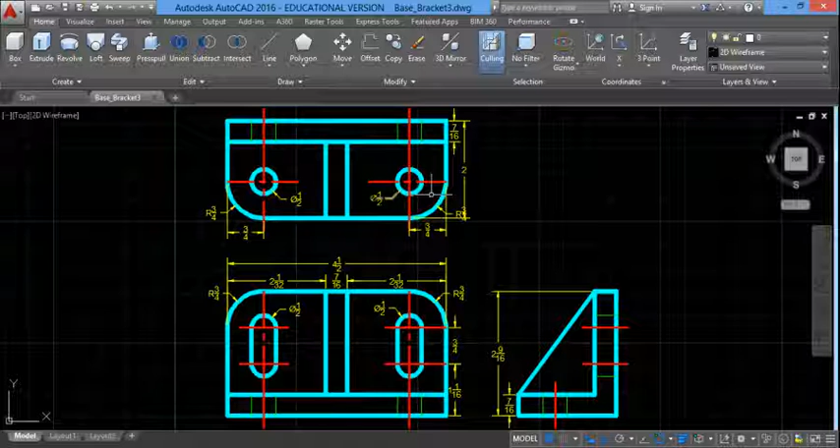In order to protect the original drawing you have made, make a copy of everything so you can work off to the side.

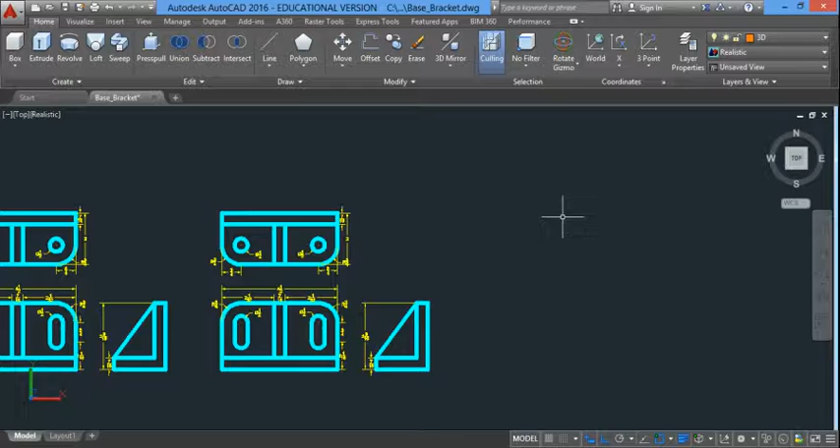Let's temporarily take off our dimensions, our center lines, and our hidden lines. If you haven't made a layer already for 3D, go ahead and do so. I made one and made it the color orange, which is the color 30. Let's take off our dimensions.

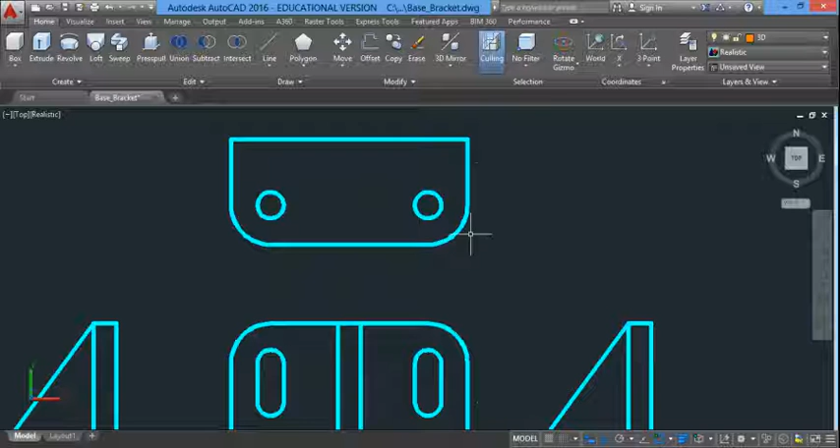I don't need these parts of this upper object. And then for the bottom, I don't need the bottom half of this. I'll need to trim that.

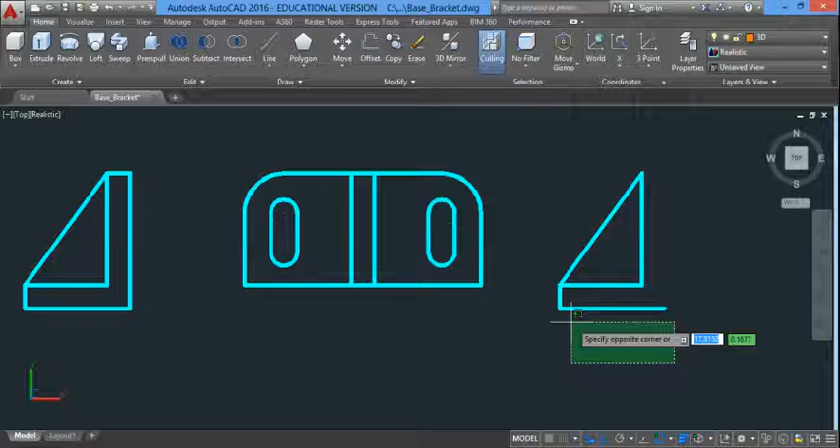Some of our commands for editing may or may not be up here, but to find them, you might have to use the down arrow here to find trim, for example. Trim off the part, or remove the parts we don't need for all these different features. Okay, so now, oh, I don't need this either.

So let's begin. We're going to switch to a southwest isometric so we can see what we're doing. The first command we need is called region, R-E-G-I-O-N. Select all these objects to turn them into solid shapes.

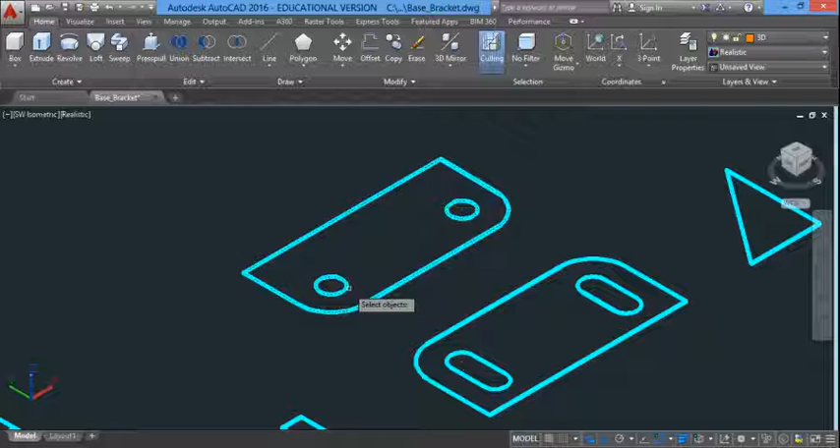I apologize, realistic was on. Let me go back to 2D wireframe. The regions will change to the layer which was current.

Let's type in region again. Do these here. Enter. Let's type in region again. Enter. What region does is it makes closed, continuous shapes.

We're about to use the extrude command to extrude these objects. Let me show you what extrude does to objects that are not closed. Let's say we wanted to extrude this, but we didn't region it.

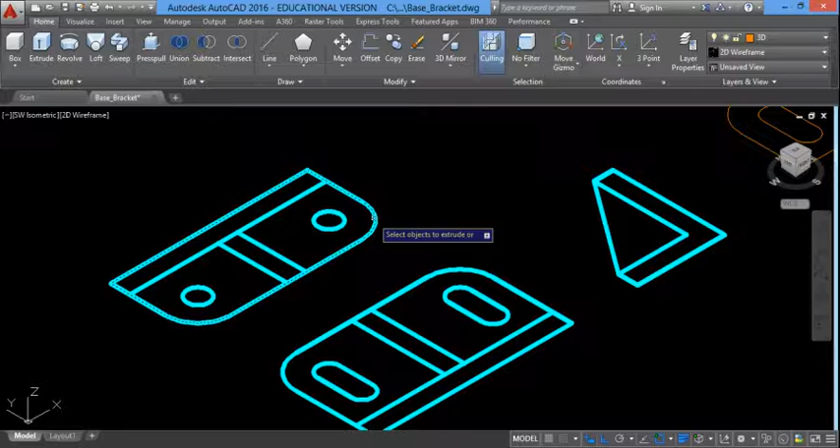It makes what's called a wireframe. That's not a solid object. So that also happens if there's a break in the object but you don't notice it, and you try to extrude, you'll also have this wireframe effect, which is incorrect. Make sure your objects are completely closed, which is why we use the region command.

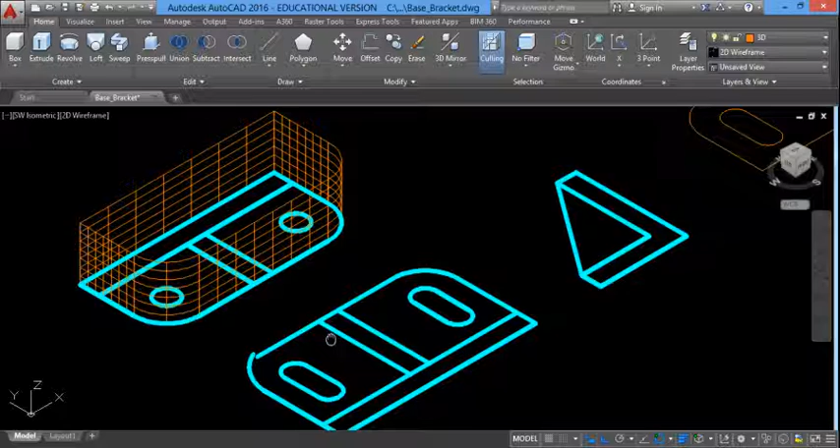Let me undo this so that I can keep its integrity when we finish the drawing. Alright, so the thickness is 7/16, so I'll type in extrude, or I pick this object right here.

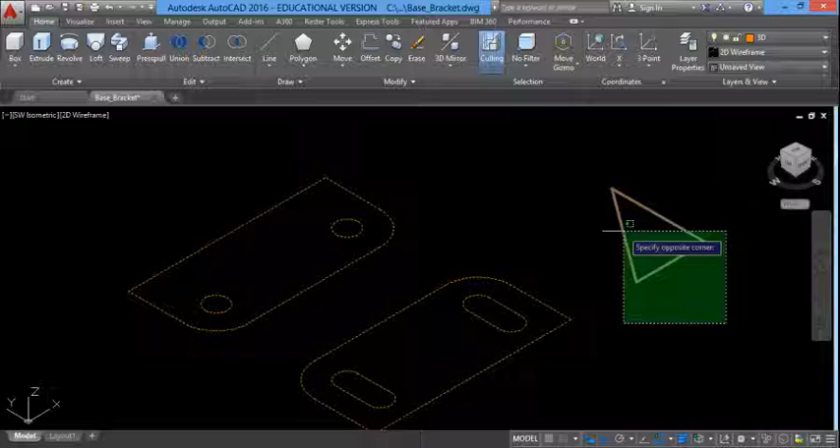I'll select this object. I'll also pick the holes. I'm extruding all three items separately. I could do them all at the same time actually. Let's just go ahead and do that, since they all happen to be the same thickness.

Type in 7/16, and there's all of our objects. However, they're not complete. We do need to subtract out the holes and slots. If I turn on the color, you'll see that all features are within each other.

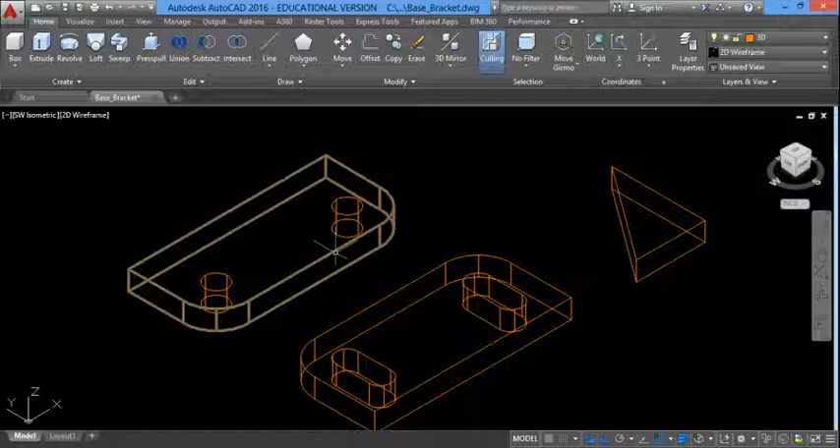So let's go back to 2D wireframe. The command we use to subtract is called subtract. We'll work with the base first. Subtract, select this object, hit enter, and then pick the small features, which are the holes, and hit enter. And let's see how we did.

There are the holes. Let's take off the realistic, go to 2D wireframe to subtract this feature. Whoops, I picked all three. Can't do that. Hit escape. Subtract, pick the large one, enter, and then the two slots, and then enter.

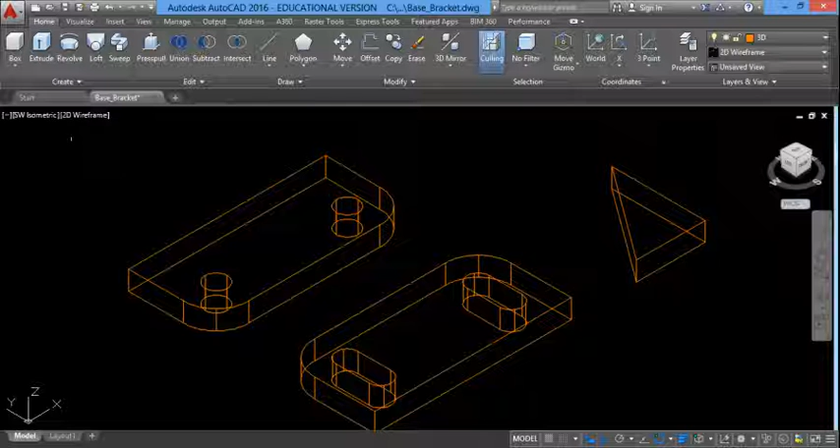Our subtractions are done, and we're going to use a command called align, A-L-I-G-N. I'll leave the color on for this purpose. To align, what we do is we move features from one to another.

The command is called align. To use align, we need to use 3 points along a nonlinear plane to move onto the surface. For example, the bottom of this will fit on the top of that. So I have some reference points I could use, the four corners, the midpoints of the object. Let me show you what align does if you just use one point.

I type in 'align', select the object, and hit enter. My mouse will say specify first source point. If I pick here and click where I want it to go, and hit enter a couple times, it'll move. That's all the align command does.

Let me undo that. If you don't see your messages on your mouse, make sure dynamic input is on. If it's not visible, click on this triple bar and turn on dynamic input.

Let's continue. If I align with just 2 points, it allows me to move and scale the object. I'm going to do this incorrectly to show you what I mean. I'll move this point to here, then put this point here and snap to the midpoint of the part. The mouse will ask, after I hit enter, do I want to scale the objects? If I say yes, it not only moves it but also scales it down to the distance in which I place that object. Useful for some things, but not for this drawing.

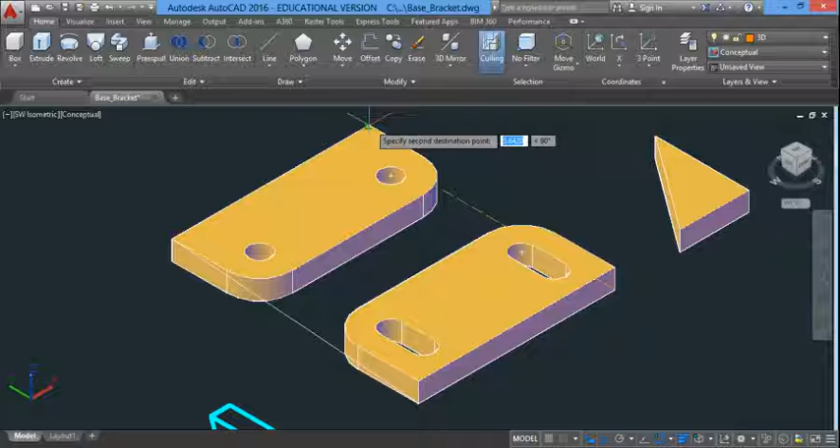So let's undo that. The other align command I want you to use is a 3-point alignment. Type in 'align', select this object, and let's use 3 points. We'll use the first point to here, the second point to here, and the third point — I had to make sure it says endpoint — and the third point is not going to be here, otherwise it'll keep it flat. I need to force it to flip up.

In order to do that, I have 2 choices: I could put this corner along this edge, or this corner along this edge. You're probably thinking there's no line that's exactly 7/16 over here for me to place — that's okay, it doesn't matter, as long as it's aligned with this edge.

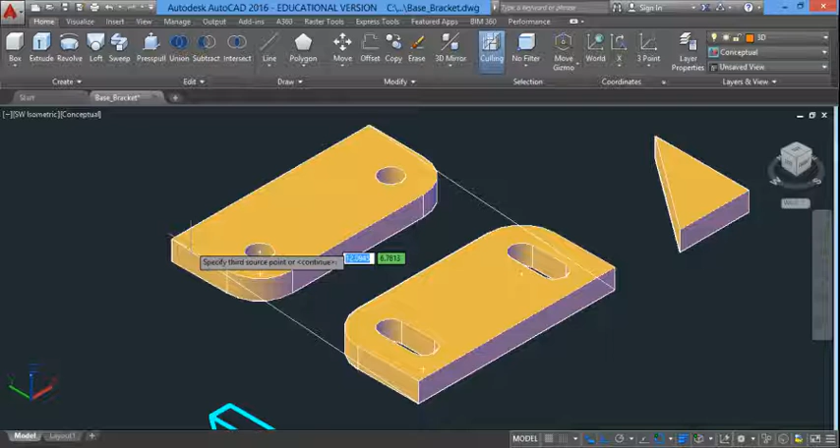So I'll pick this corner, which represents this line now, and be along this edge here. I could pick, for example, this midpoint. You'll see it move and rotate. Now, of course, we want to make sure that worked, so we have to do 2 things: take off the color, make sure the lines are directly on each other — and they are.

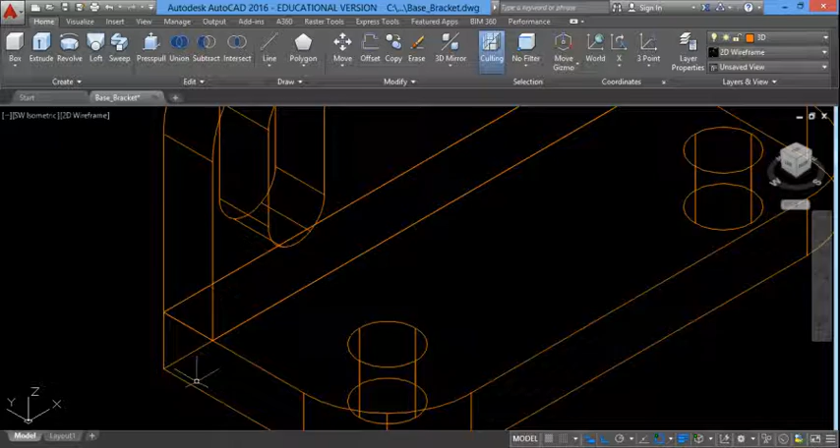Alright, to move this to here, we need to do the same thing, snapping points. However, at times we don't have features on here in which we could do that. We may — let's find out.

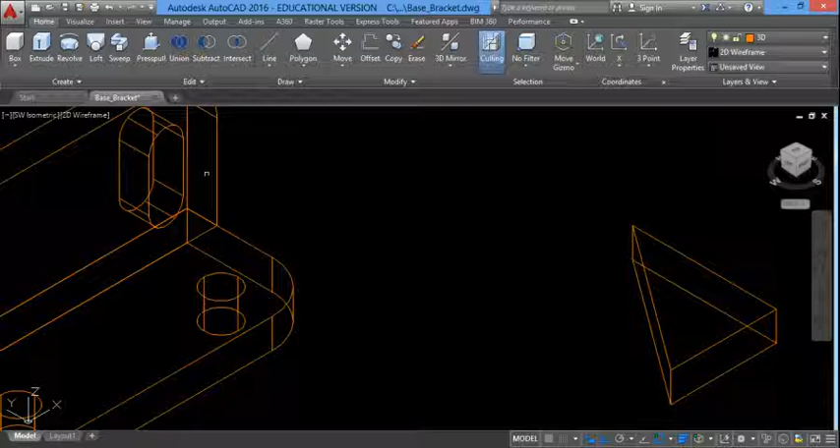For example, I know the top of this midpoint will snap to the midpoint of this feature. The midpoint of this will snap to the midpoint of this feature, and this would have to snap to the midpoint of this feature. However, it looks like there's some lines overlapping each other right here, so we might need to rotate this so we can see which lines we need to snap onto. You see that right there? That's important — if you pick the wrong snap points, your alignment may not work.

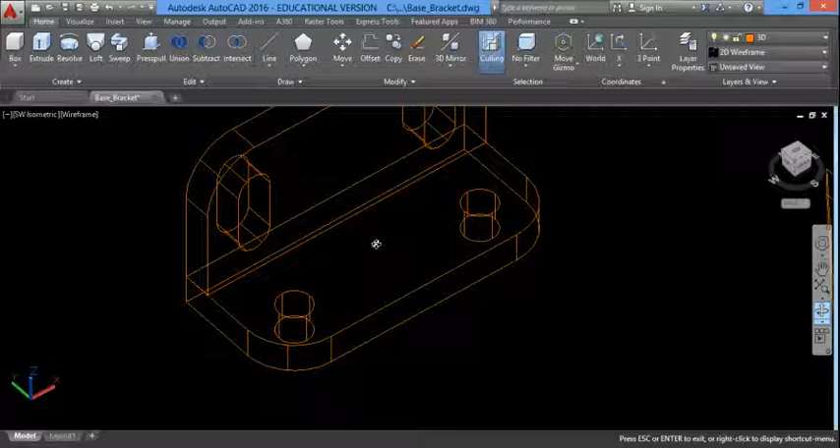So let's give it a shot. Let's move this closer so we can see it, and take off my ortho for a bit. Alright, let's try this — align. Select the object, hit enter. Find the midpoint of this to there. This belongs along the middle of this line. And the midpoint of this belongs to the middle of that line. Let's find out if it works.

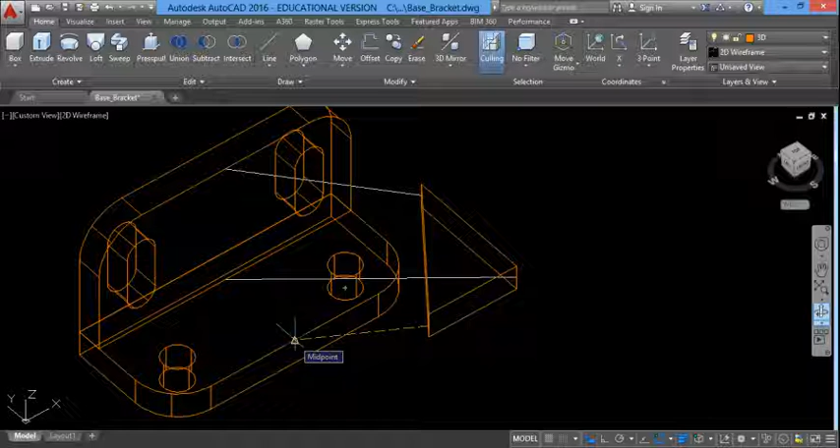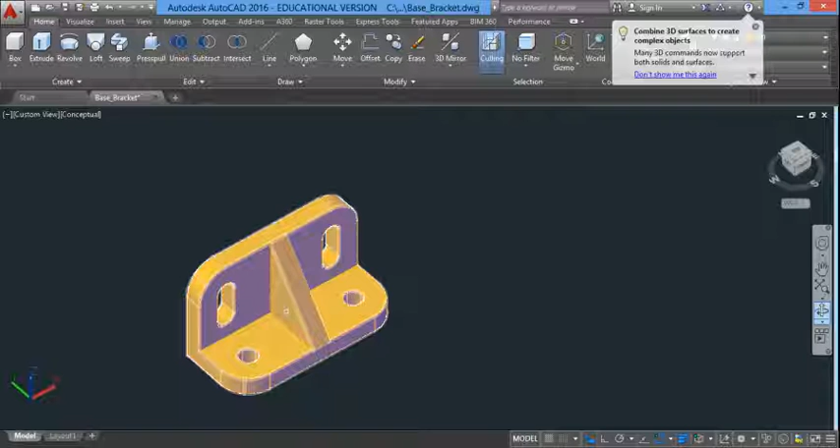And fortunately we did. Let's take a look at our object — looking good. Now we got to realize these are 3 separate parts. We need to union them together to turn it into one solid object. So pick union, select these 3 objects, and hit enter. And now we have our part. Pretty cool.

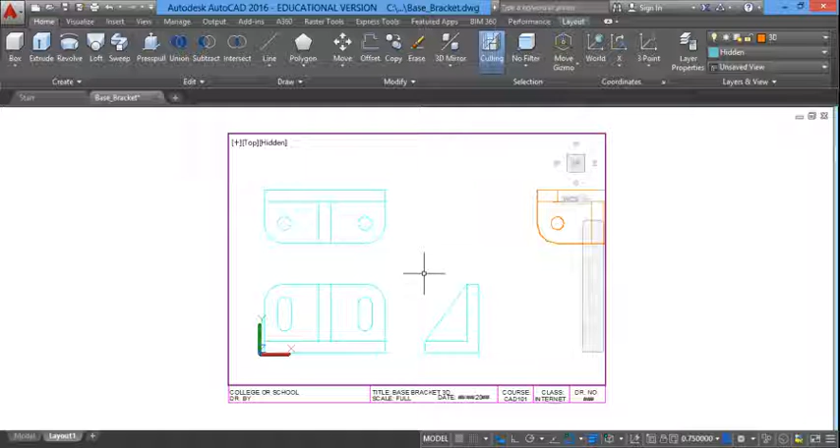Alright, let's go back to Southwest Isometric. So the object has to be displayed with our 2-dimensional drawing. If you go to your paper space, you'll see the view is actually looking from the top view. We need to get this orientation into an isometric view.

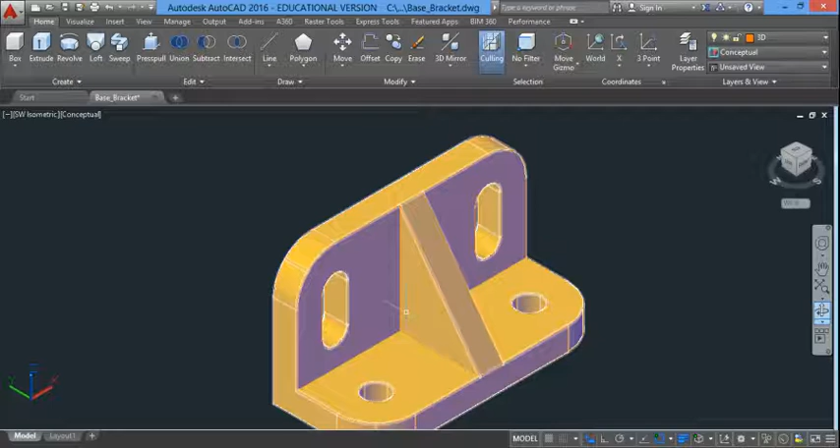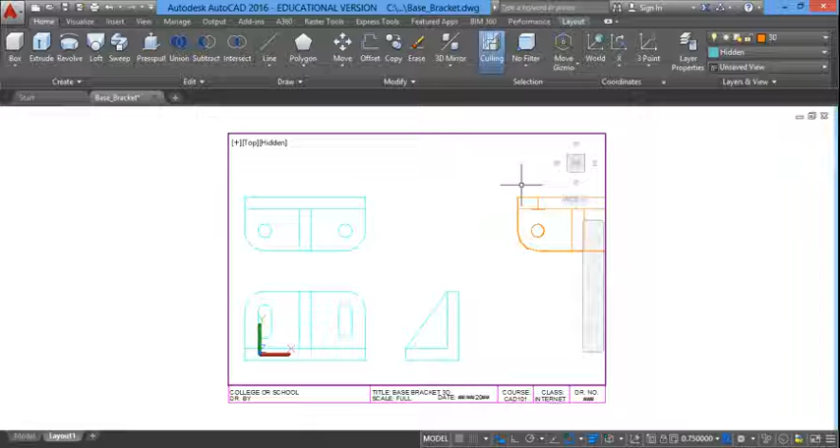There are 2 ways to approach that. I'm going to teach you a new one at this point. But before we discuss it, we need to decide which isometric view we want — the Southwest isometric, or not that one, Northwest, Northeast, Southeast isometric. Let's figure this out before we start. Our front view and our right side view are displayed here, which means the isometric of the 3D object needs to show the front and the right. That looks like the southeast isometric right here.

Alright, so here comes a new concept.

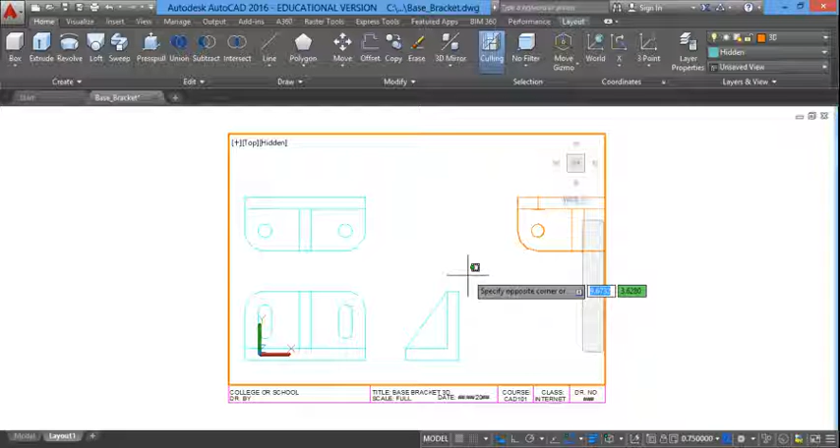I need to turn on the viewport layer, since we're going to be using that again. Here's the viewport for everything you see here. I'll click outside so I can grab my viewport and pull it down a little bit. I can still control my object when I click inside. However, I need to click outside and create a new viewport so I can display just this object by itself.

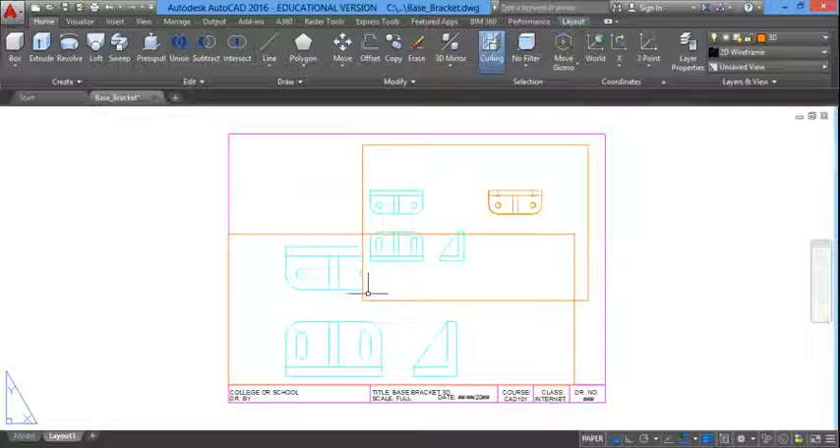So watch carefully. Type in mView on the viewport layer. I'm going to draw a rectangle using opposite corners with the mView command and make a second viewport. I'm doing this for a reason, and you'll see why now.

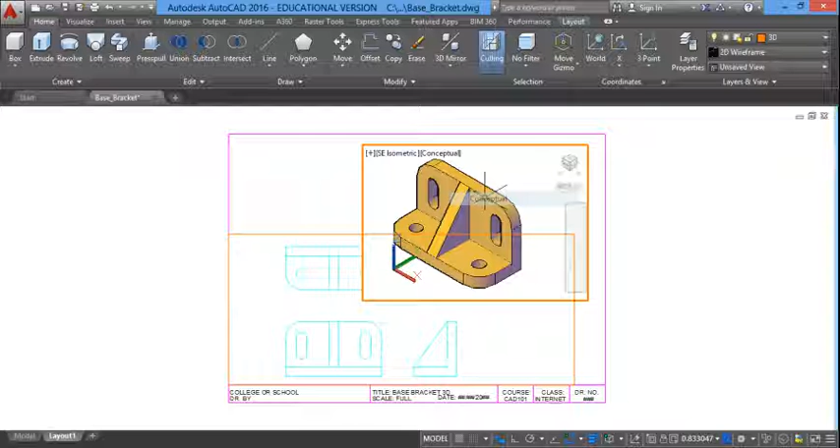I'm going to click on this corner once I get inside the viewport and change it to southeast isometric. I'll make sure hidden is on in this case. Let me show you what the other ones look like, but we're going to use no color, so hidden would be that feature.

Notice how in this viewport I can control the appearance of this, and in this viewport I can control the appearance of that. I can make this viewport a little bit larger. I should turn ortho back on to do this. I know there are some unusual details to work with around here, but it should work out when we print it.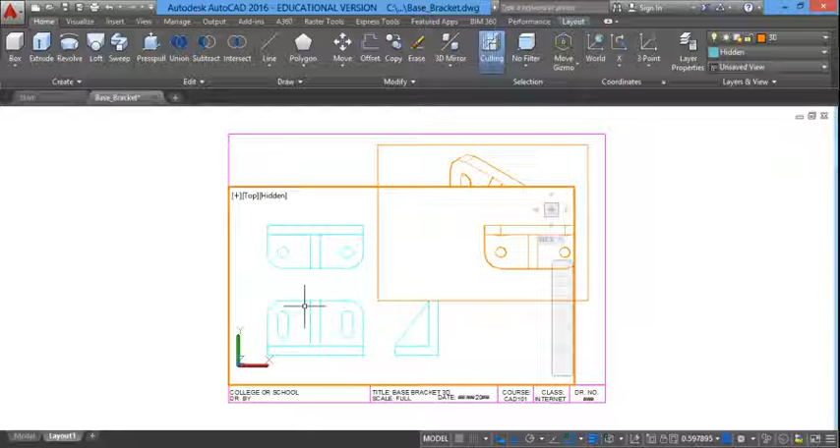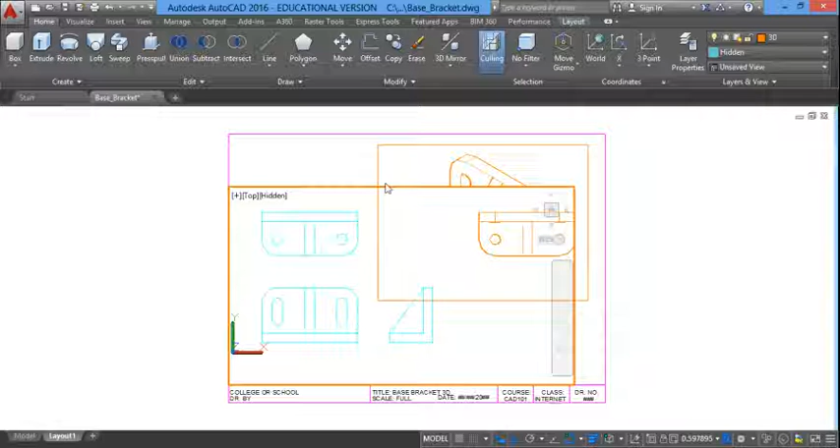Let's talk about those issues. First of all, as you can see, this viewport is replacing or covering part of my lines over here. And if I try to adjust them, this feature will pop up again behind this one.

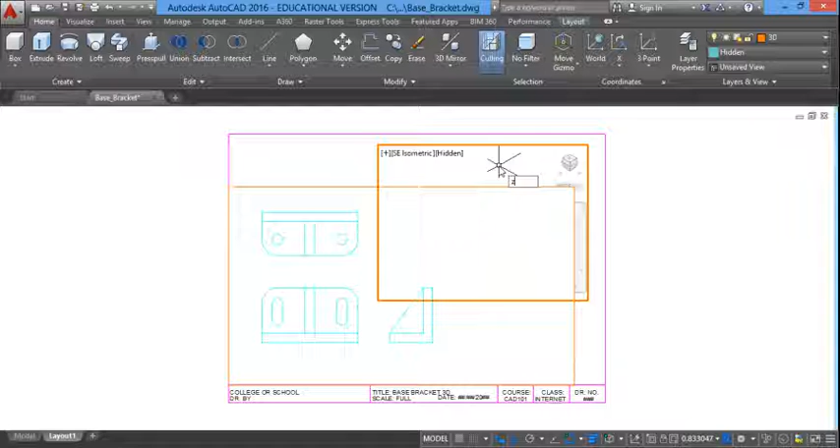So I would probably go over here and move this farther away so that this is alone, kind of like that. Over here, I've got to go find that 3D view, so I'll do a zoom extents. Move it in closer, then type in zoom 1 XP, see if that's not too large. Yep, that looks too large. Let's type in 3/4 XP, Z enter, 3/4 XP.

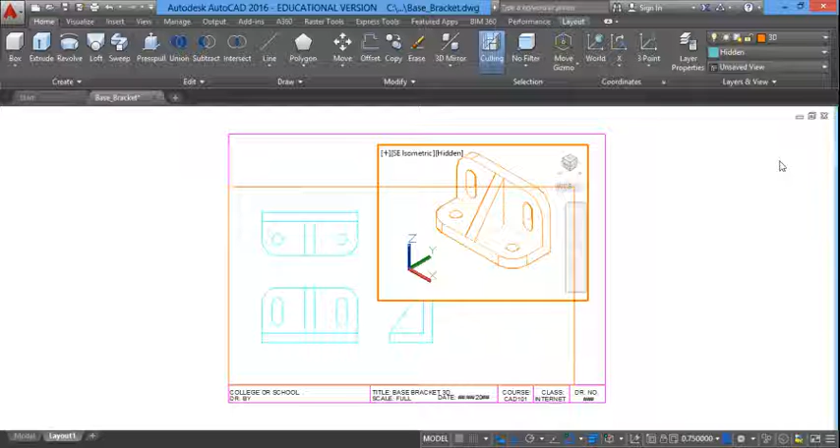Now we're scaling the drawing, which is what we're doing there. Let's move it slightly off to the side. I could take this viewport, click outside, place it on the corner here, and click back inside. It has some more room over here. Whoops, I'm using the pan command, not scale. I'm not zooming in around.

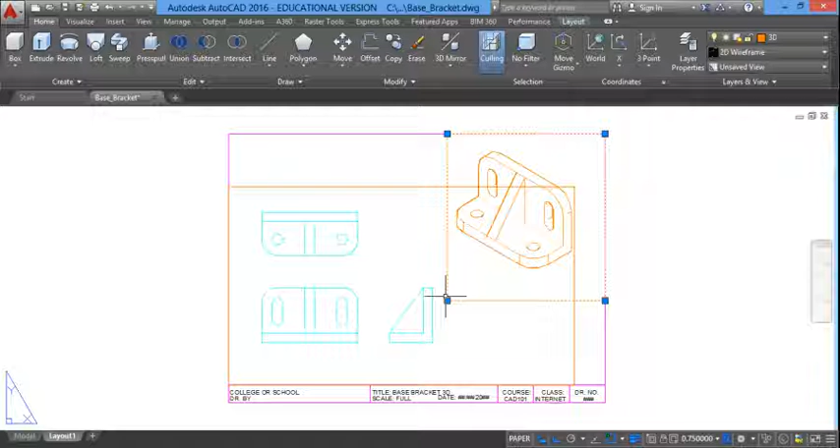Now for this viewport, making this a little smaller. And over here, in this viewport, I'd better put my layers back on. So I'll type in Z enter, 3/4 XP enter, because that was the scale I used for here. Now both of my viewports are scaled.

I believe we could take out the viewports, let's see. Did I not put this... oh, I did not put that on the viewport layer. Now it's on the viewport layer. Okay, now I know a little feature is missing right here.

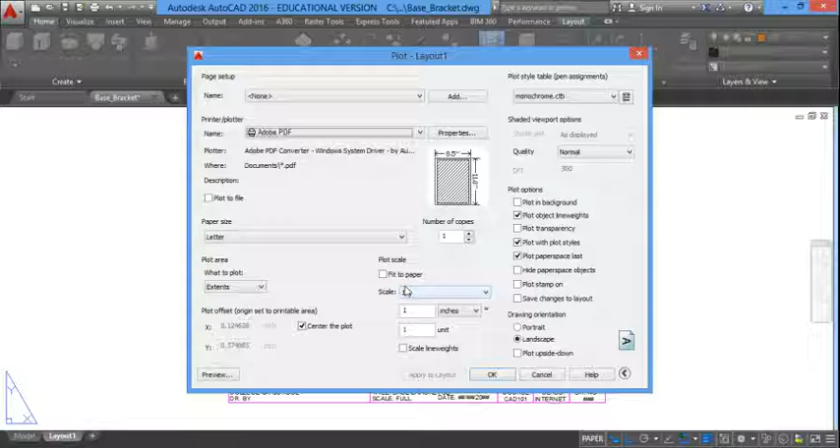Let's see if I can print and the viewports disappear. Let's verify this right now. Nope, there's an issue right there. So let's see what's going on here. I might have to play with this viewport. Put the viewports back on. I don't want this to be too much work for you guys.

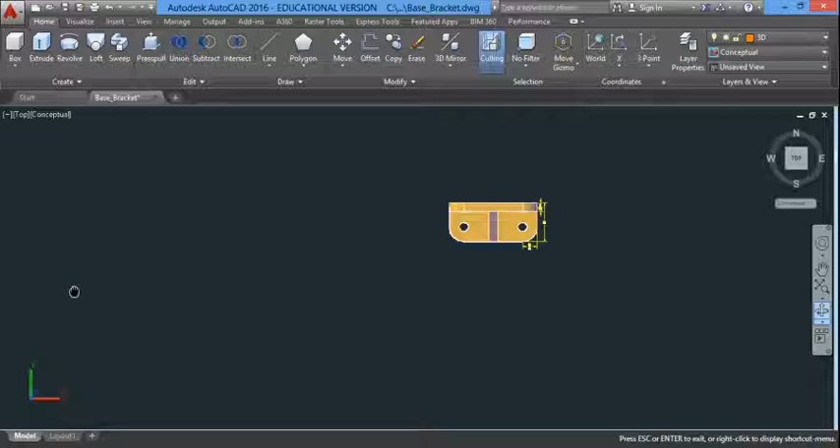I can see some dimensions in that viewport, in that drawing, that I need to remove. Right there. Drafting is never easy, right? There it is, right there. Now I can see everything here. Let's turn off the viewport layer.

Let's print this, see what we have. Alright, unfortunately my color is still showing up even though I chose monochrome. I'm going to quickly change all my layers to white so I could see this a little better. Let me select everything. Sorry, title block, you're going to be white too.